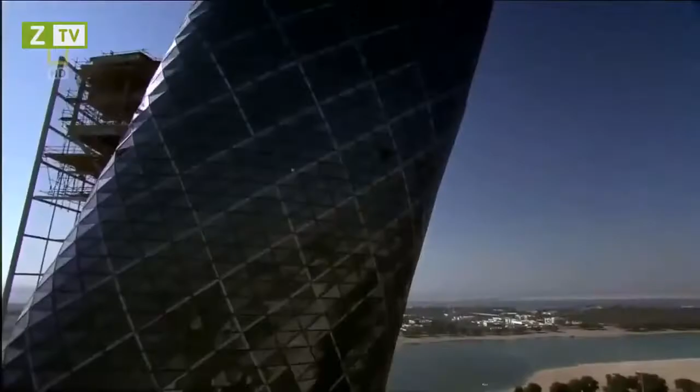Dubai is famous for its audacious engineering projects. But now, its neighboring city, Abu Dhabi, could surpass them all. This is Capital Gate, the most inclined skyscraper on the planet. It defies gravity, leaning at almost 5 times more than Italy's Leaning Tower of Pisa.

To make it stand up, it'll take some extraordinary engineering that could rewrite the skyscraper rulebook. Situated on the edge of the Persian Gulf lies the Sheikhdom of Abu Dhabi. It's the largest and richest of 7 states that unified in 1971 to form the United Arab Emirates.

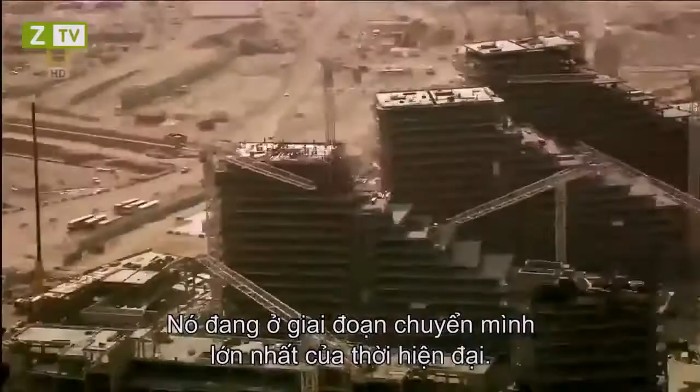Abu Dhabi is undergoing one of the biggest makeovers of modern times. Its ruler, Sheikh Khalifa bin Zayed Al Nahyan, wants to join the City Super League. And he's spending over $200 billion to transform his capital into a world-class business and tourist destination. He's already spent a reputed $3 billion creating the most expensive hotel ever built.

The Emirates Palace boasts 114 gold domes and is the height of luxury, where rooms cost up to $12,000 a night. And that's not all. He's built one of the largest and most opulent mosques on earth. Capable of accommodating 40,000 worshippers, the Grand Mosque boasts the largest carpet on the planet and the world's biggest gem-encrusted chandelier. But even these structures have not quenched his thirst for the extraordinary.

Now, the Sheikh wants a building so spectacular it will instantly become an international symbol for Abu Dhabi. The man appointed with the task of delivering this architectural icon is the Sheikh's cousin, His Highness Sheikh Sultan bin Tahnoon Al Nahyan. Architecturally, it will be a unique building, positioning Abu Dhabi as one of the cultural hubs around the world. And architecture is part of that overall inspiration and art.

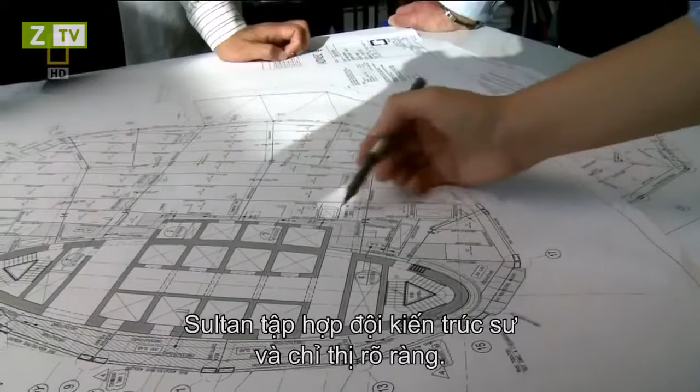It's a tough challenge. This is a land where extreme engineering is the norm. Neighboring Emirate Dubai has already built the world's tallest skyscraper, the 828-meter-high Burj Khalifa, and an iconic luxury hotel, the Burj Al Arab. Sheikh Sultan signs up a team of architects and gives them a clear brief, not to go bigger or taller, but to challenge the rules of architecture.

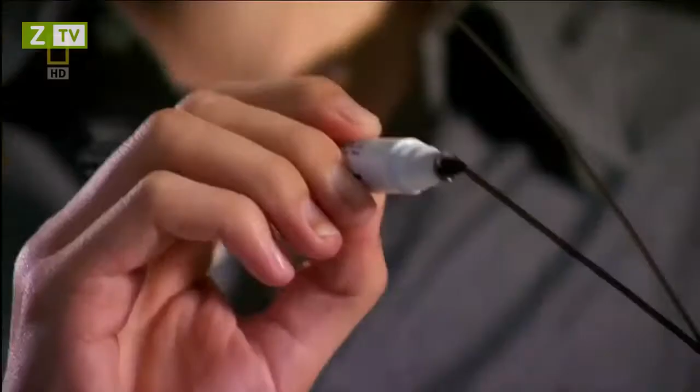For Neil van der Veen, one of the concept architects, it's a unique opportunity. The spirit of the times in the UAE was that anything was possible. Really, you could do anything. We can do something in the architecture that will represent that Abu Dhabi is right at the cutting edge. The architects look for inspiration in Abu Dhabi's landscape. They find it in the windswept dunes and the rolling waves of the Persian Gulf.

We took this idea of wind and water, which are both dynamic, fluid type of rhythms of nature, and we said, how can we capture those in time? As a result, you get a much smoother facade. I was really very happy when we first saw it, because with such a building, you can get the first impression from the first few seconds.

The team come up with an extraordinary design. A tower that spirals out of the ground to 160 meters, inspired by a desert whirlwind and the splash of a wave rising over the sand. This gravity-defying skyscraper tilts almost 5 times more than Italy's Leaning Tower of Pisa. No single angle of this tower is the same as another. It's a structure guaranteed to amaze.

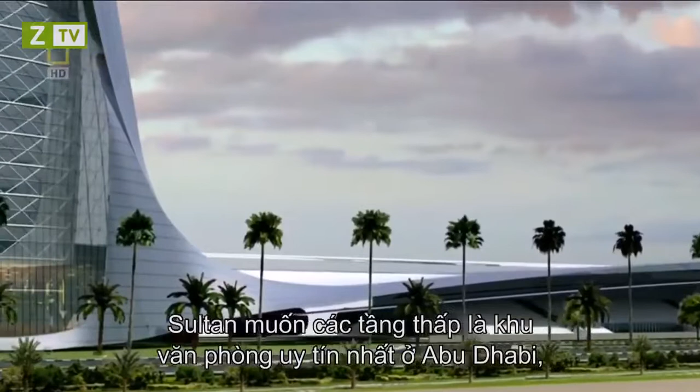We really wanted this to happen. They could see a vision suddenly, they could see something that would stand for them. Then there was no stopping us. Sheikh Sultan wants the lower floors to become the most prestigious office address in Abu Dhabi, with the top 18 levels assigned as a 5-star hotel fit for royalty.

But for maximum impact, this landmark skyscraper also needs a prestigious location. The Sheikh decides the tower will stand next to a monument of national importance, the Grandstand. Built by his uncle and founding father of the United Arab Emirates, Sheikh Zayed, it's used to this day for national celebrations. This monument and the skyscraper will link Abu Dhabi's future with its past.

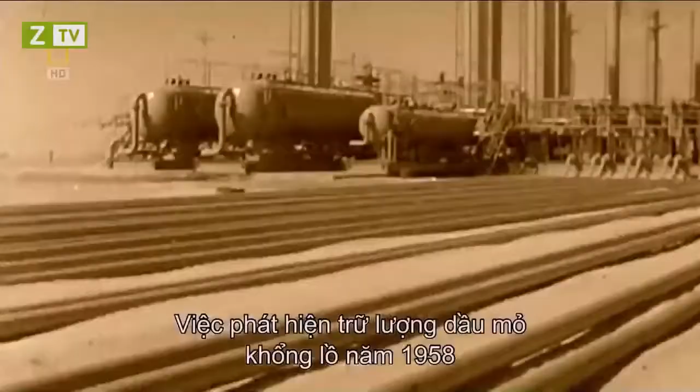Over the past 50 years, this land has experienced extreme change like no other. The discovery of huge oil reserves in 1958 set the wheels of progress in motion. Abu Dhabi's ruler Sheikh Zayed had a vision to unify the sheikhdoms and secure their financial future from Western dominance. He then set about using his black gold to create a city that rose out of the desert.

Today, Zayed's legacy is all around, and now his son wants to leave one of his own. To transform Abu Dhabi once again, but this time to put it on the world map. Sheikh Khalifa plans a new $2 billion business district called the Capital Center, situated alongside the Middle East's largest business hub, the Abu Dhabi National Exhibition Center. It's the ideal location for an architectural icon. And inspired by its location, the new tower is named Capital Gate.

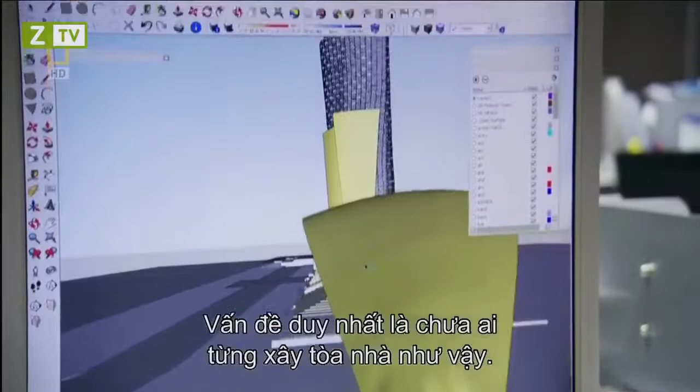Now, the idea must make the leap from the drawing board to the construction site. The only problem is, no one has ever attempted a skyscraper like this before. Everyone realized that this is a crazy structure to build, and how are we going to build it?

To make Capital Gate's gravity-defying design a reality, it'll take some extraordinary engineering, and the challenge begins on day one. Its top floors overhang its base by 33 meters, creating huge forces that want to rip the building's foundations out of the ground.

At the construction site, project architect Tony Archibald is daunted by the task ahead. When I first joined the job, I was shown the drawings, and I kind of did a double take, and I wasn't quite sure that I got the correct understanding of the project, and it took me a few moments before I realized what we're about to undertake.

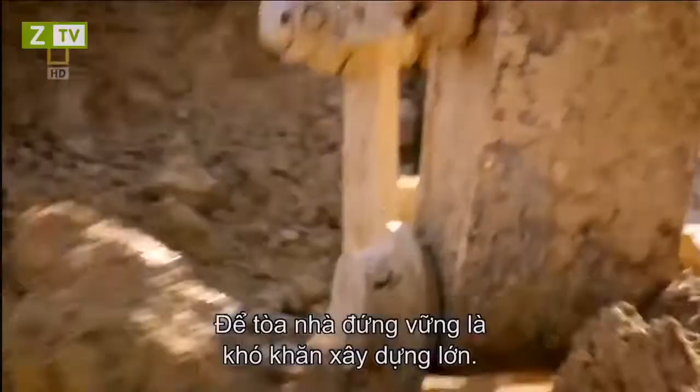Keeping Capital Gate upright is a huge engineering challenge. There isn't just one solution. To overcome the forces of gravity, it will take a whole range of pioneering techniques. But the task starts with the foundations, deep underground. On one side of the building, the weight is going down into the ground. On the other side, it's being lifted out of the ground. And that's due to the large overhang that we're having to deal with.

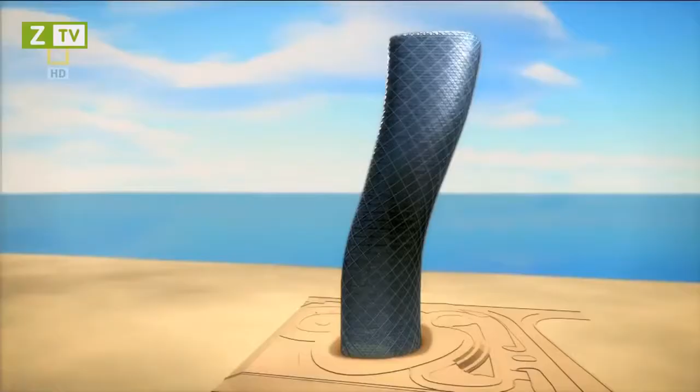The solution requires almost 400 concrete piles that work in 2 different ways. On the leaning side, half of the piles push the overhang's forces into the ground. On the opposite side, the remaining piles anchor deeper into the bedrock. They resist the stretching forces trying to wrench the building out of the ground.

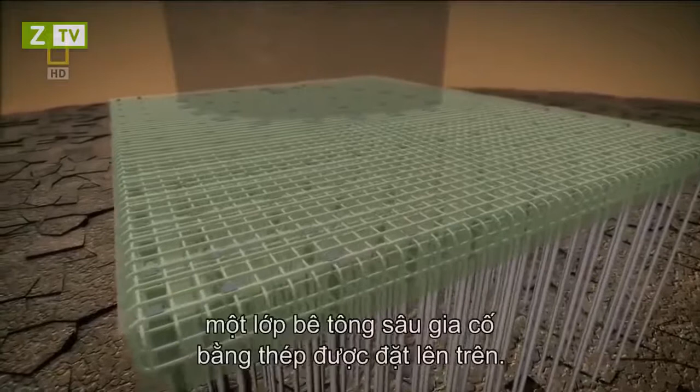Finally, to evenly distribute Capital Gate's forces into the piles, a deep concrete slab reinforced with steel is laid on top. What the foundations taught us is that every single aspect of this building has to be custom engineered.

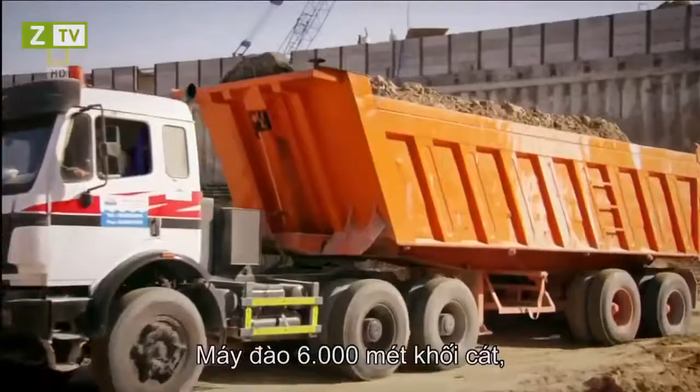Excavators dig out a colossal 6,000 cubic meters of sand. And over 8 weeks, hundreds of piles are driven into the ground. We had an awful lot of piles to put in a very close proximity. It was a real difficult challenge. There can be no let-up on this schedule. Sheikh Sultan wants Capital Gate complete by an impossibly tight deadline.

In less than 2 years' time, Abu Dhabi will host the World Future Energy Summit. Over 3,000 delegates from 50 countries and the world's press will convene at the neighboring Abu Dhabi National Exhibition Centre. It's the perfect opportunity to showcase Capital Gate and prove Abu Dhabi is at the forefront of innovation. But this gives the team just 24 months to design and build a unique skyscraper.

With the foundations finished, building above ground can begin. But because of the dramatic lean, it will have to be constructed in a very different way to a conventional skyscraper. We realised once we'd done the foundations that this was going to be the first of many difficult problems. A normal skyscraper requires a solid core to hold it upright. But Capital Gate's curves will just crack and topple a standard core. Engineers must discard conventional thinking and devise a way to defy gravity.

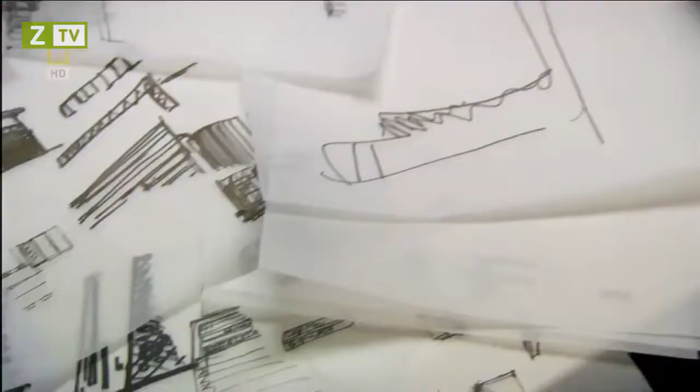Inspired by the nearby desert landscape and its wind-shaped dunes, architects have designed a curved leaning tower. But it'll take some audacious engineering to stop Capital Gate from falling over. Normal skyscrapers are built around a slim vertical core, which helps to channel the building's weight into the ground. There's so much overhang on this building that with a conventional core, there was no way it was going to work. You just can't build a straight core. It's just not strong enough.

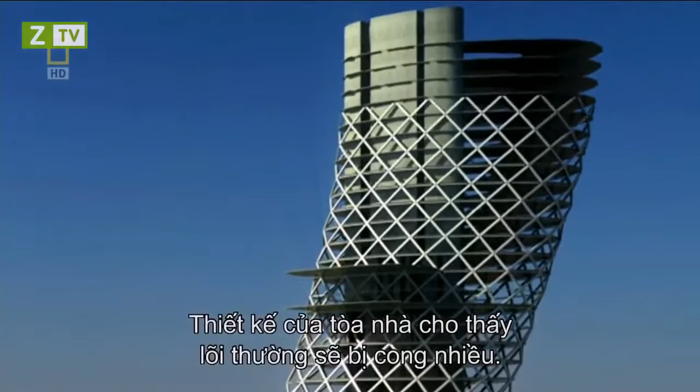Capital Gate's design would cause a conventional core to bend dangerously. The pull of the massive overhang wants to stretch the core on one side, causing the concrete to tear apart.

Structural engineer Mona Vassi knows it's a serious problem that must be solved. When I saw this one, I thought it's impossible, it's not going to work. It's just some sketch somebody left somewhere. But I always think that for the architects, it's easier for them to just draw something, but it's not easy for us to fulfill or satisfy their need.

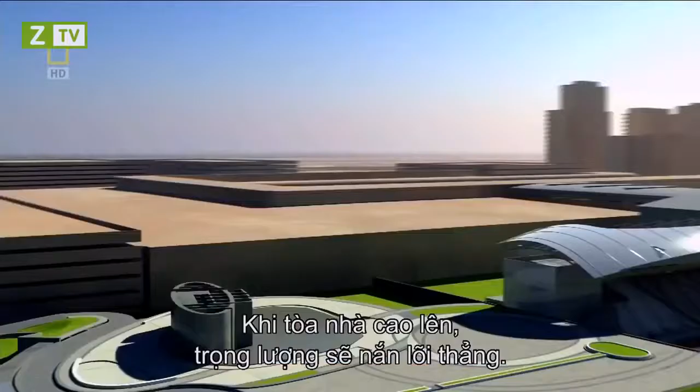The engineers developed 2 groundbreaking solutions. The first part of their plan is to build the core with a curve, bending in the opposite direction to the building's lean. As the structure grows, its weight pulls the core straight. In total, it shifts 350 millimeters, and the effect is significant. The concrete that would have been stretched by the overhang's pull will now be compressed and strengthened.

You build it bent, and then as you add the slabs to the upper levels, it pulls it back into vertical. So basically that whole vertical core is in compression, and that gives it immense strength.

The core grows 4 meters a week, and construction manager Les Fairchild is in charge of building it. This is probably the most complex core that I've come across. It's built at an angle, and effectively the core holds the whole building up.

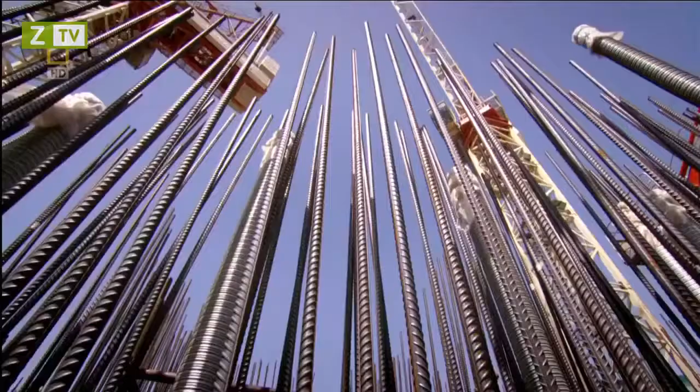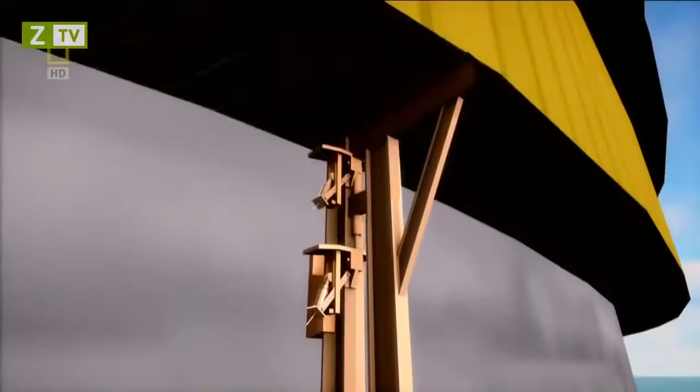The core is built using a technique called jump forming. First, a dense mesh of steel reinforcement is assembled. A mold then closes around the steel to form the shape of the core. The steel mesh is then filled with concrete. Then the mold or form can climb up the core wall for the process to start all over again.

Jump form is a hydraulic platform. Once we've cast each 4 metre level, we simply attach it to some runners and we jump it hydraulically up to the next level. The core will be strengthened as it straightens. But for the core to carry extreme loads, the concrete must be reinforced using steel rods called rebar.

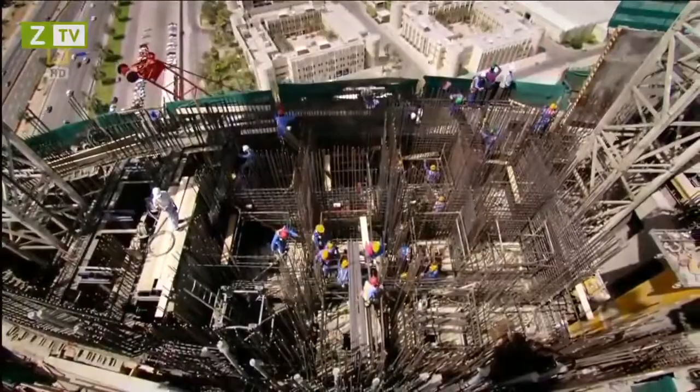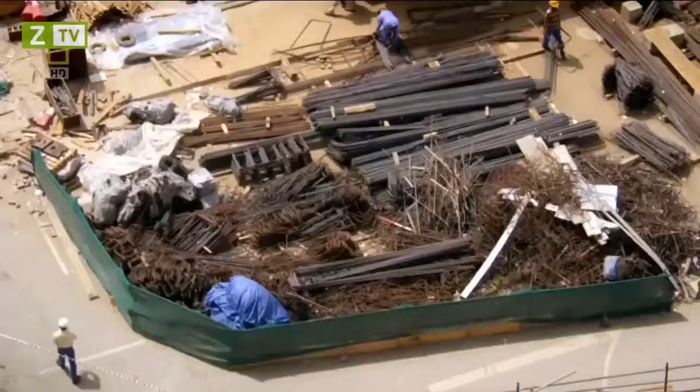The rebar is installed during the daytime, but temperatures of up to 50 degrees Celsius and concrete don't mix. It dries too fast and could crack. To set at the right speed, the concrete has to be poured during the cool of the night. As the core grows higher, the liquid concrete has to be pumped over longer and longer distances. So the consistency of every batch is first checked in a slump test to ensure it won't block the pipes.

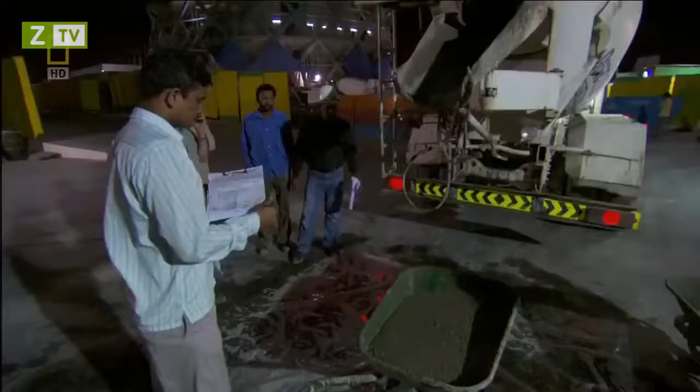When you first see it coming out the wagon, you can usually tell whether it's a tight mix or whether it's a loose mix, and that's what we're testing for really in the slump test. We simply make a cone, lift the cone off, and depending on how much it reduces in height, it tells you exactly what the slump is. The one we just witnessed is 215 millimetres, which is within the specification, so that's good to go.

Whilst the truck drives to the pump, Fairchild needs to get onto the core. He can take the stairs, but 90 metres up is a long climb. He knows a much faster way. Crane lift.

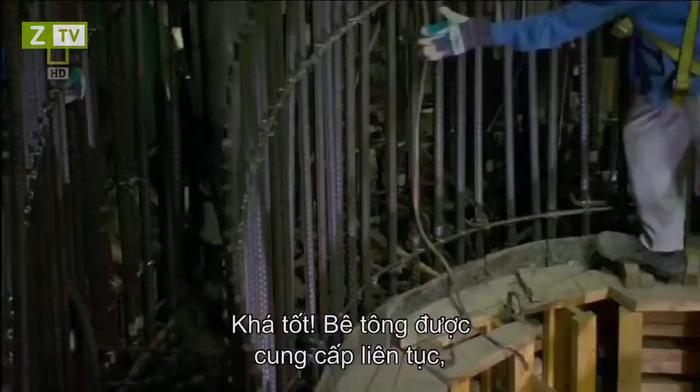It's going fairly well. We've had a nice continuous supply of concrete and we're now pumping it up to the upper levels of the building. And the lads are just steadily working away. They actually work from one side to the other in metre deep layers, so they're doing everything right. It's always exciting when we pour concrete. It means it's another achievement really. We're going up another level.

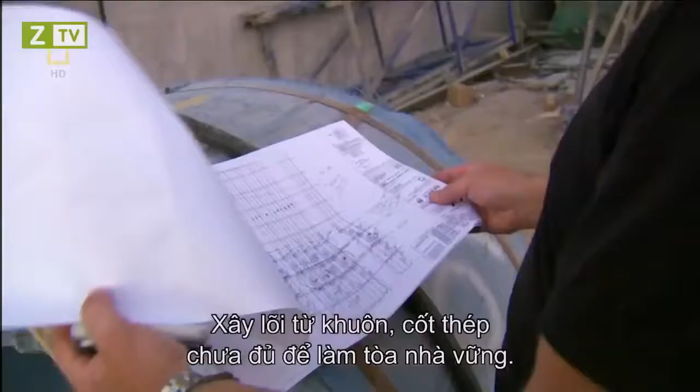But building the core out of alignment and packing it with rebar still isn't enough to stop gravity toppling Capital Gate. What we came up with is a post-tensioning solution where we introduced much more reinforcement into the core wall and then used the tensioning process. Basically that was done by introducing high tensile strands to the centre of the walls. When we reach the designated height, we simply apply tension.

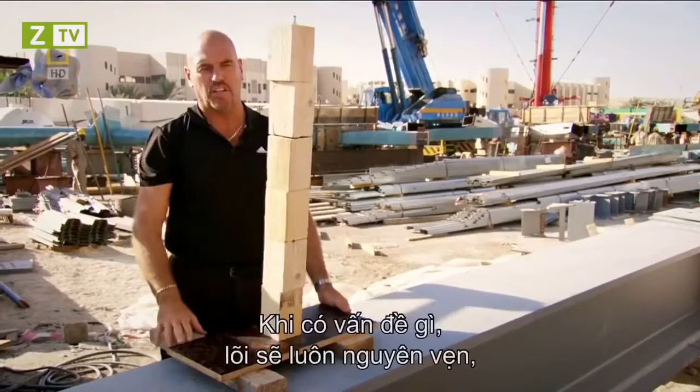We're actually stretching the tendons that fall through the wall and we're actually pulling them tight, and that's done by a tensioning machine. So effectively, when the tension is complete and the load was applied, the core would stay intact and the additional reinforcement would prevent it from falling over. To post-tension the core, 146 steel tendons are threaded vertically through the concrete.

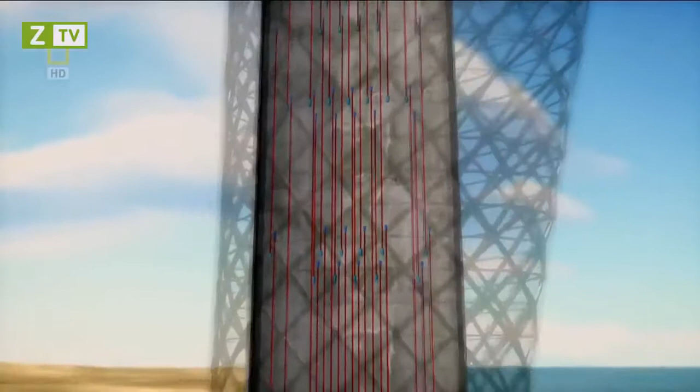Each tendon is 20 meters long and runs through 5 floors of the building, overlapping each other for maximum strength. When the tendons are stretched, the stress counteracts the pulling force created by the massive overhang, stopping the concrete from tearing apart. On site, the team are post-tensioning the core. But no one has ever attempted this vertically in a skyscraper.

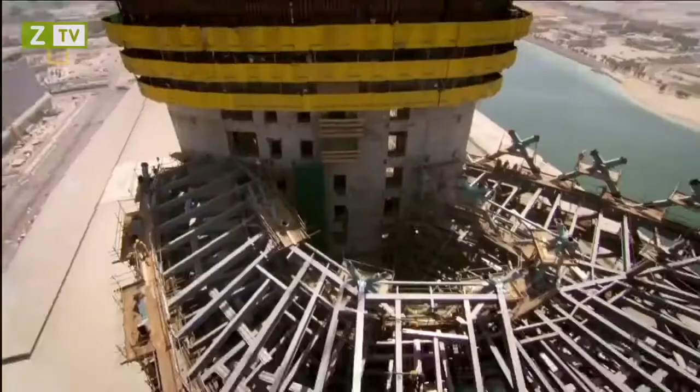The long tendon is lifted to the top of the core. The team used the steel tendon's weight to force it through a duct already cast through the core. Once the tendon is in position, the team lock off both ends, ready to tension its individual strands. A pneumatic jack clamps around one strand at a time and stretches it. It's equivalent to about 5 family cars pulling on one end of the rope.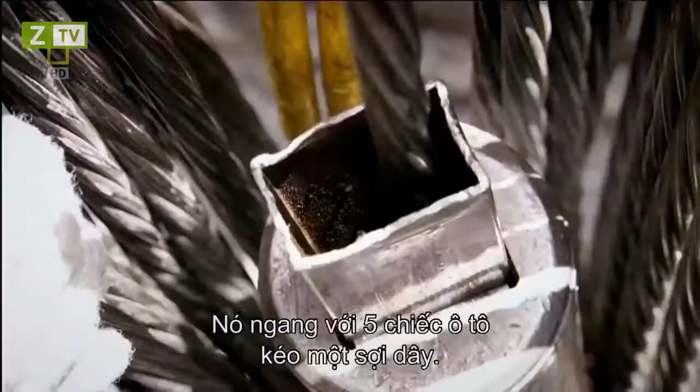With the steel tendon now stretched to the right stress level, concrete pouring can continue upwards. The quantity of cable that's been used is approximately 120 tons and 120,000 metres in length. It's about 44 times the Golden Gate Bridge. This process is repeated over and over and means the core should withstand the huge loads generated by Capital Gate's extreme overhang.

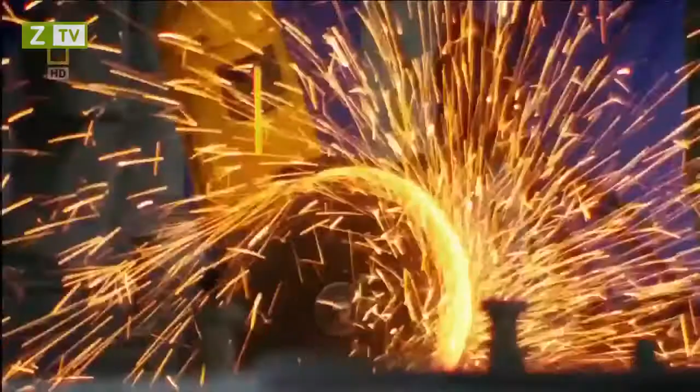But now, an even greater challenge must be tackled. The building's twisting, leaning design must somehow be turned from theory into reality. And once again, it'll mean bending the rules of architecture.

To create Abu Dhabi's architectural icon, Capital Gate needs an exterior curved leaning frame. But once again, the building's extreme tilt creates a problem. The shape of the building with this very pronounced overhang meant that traditional skyscraper building solutions just weren't going to work. There was no way. The building design requires it to be thin to maximize floor space and allow for huge panoramic windows.

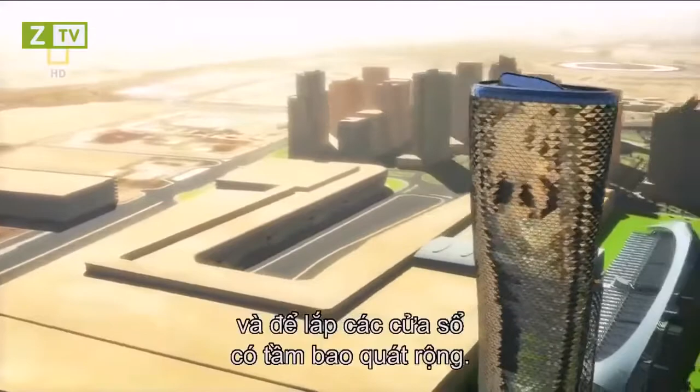Irfan Ahmed is one of the engineers who has to find a solution. For structural engineers, always it's challenging to accept the architectural requirement, you know. They always want thinner and thinner and thinner. Surprisingly, the humble chicken could help with this engineering dilemma. It is essentially a skin of structure around the outside of the building, not unlike an egg.

An egg can withstand huge loads because it evenly distributes forces down through its shell, which means the shell can be thin, creating more space inside. So it's very, very thin, it's very, very strong. If I try to crush this egg, you can see that it's actually amazingly resilient. So let's see how resilient.

Here I have 170 eggs laid out, and we're going to put load on top of these in the form of breeze blocks. Moment of truth. So far, so good. Each one of these blocks weighs 15 kilos. So we've nearly got half the weight of a car on here now, on our 170 eggs. Let's see how far we can push this.

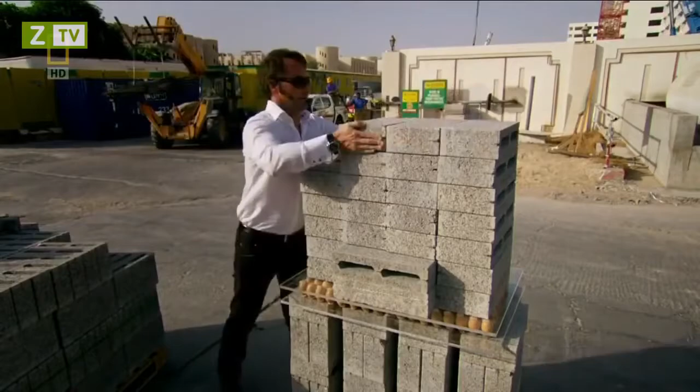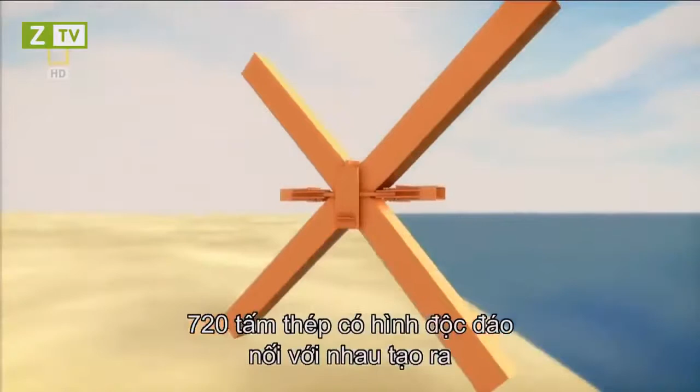Capital Gate can't channel forces with eggshell, but it can use the principle of how it works, using a diagrid. A diagrid is a giant mesh of steel that wraps around the core. Steel beams connect to a node or joint to form a cruciform section. 720 uniquely shaped sections link together to form the thin but immensely strong diagrid. Working together, these cruciforms equally distribute the forces down the outside of the building.

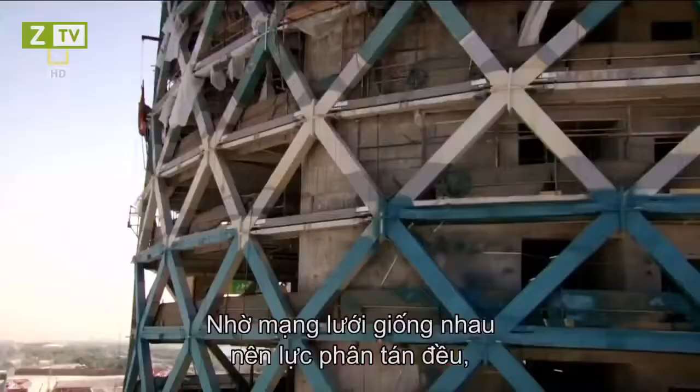The way it does that is by making a uniform net, so that the forces are very evenly distributed. And that means that we can get away with slenderer sections. On site, a team of 240 steel fabricators assemble the diagrid. They've built the easier straight part of Capital Gate's base, but now the structure is starting to lean, making installation even more challenging.

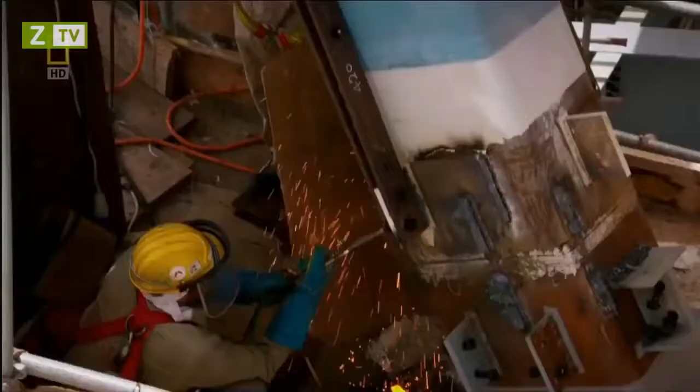Each cruciform, weighing up to 16 tons, has a unique geometry and must be crane lifted at a precise angle. If the diagrid is not assembled with millimeter accuracy, the mesh will not channel the loads and the structure could be weakened. The engineers must communicate closely with the expert steel fabricators. They design and manufacture the diagrid 150 kilometers away in the neighboring emirate, Sharjah.

Here, cutting-edge construction is the norm. They've built one of Malaysia's Petronas Towers and Dubai's iconic skyscrapers, the Burj Al Arab and the Burj Khalifa. But Capital Gate's revolutionary design pushes even these experts to the limit. On the planning floor, project engineer P. Bhaskaran and his team need bespoke 3D software to tackle the building's highly complex diagrid. The 3D modeling is done, and any unforeseen criticalities will be very clearly identified in the 3D model.

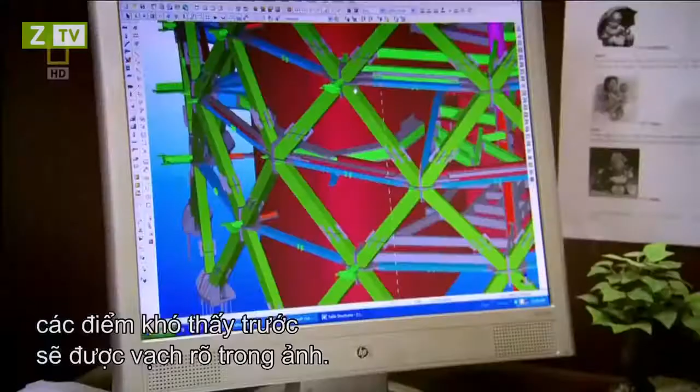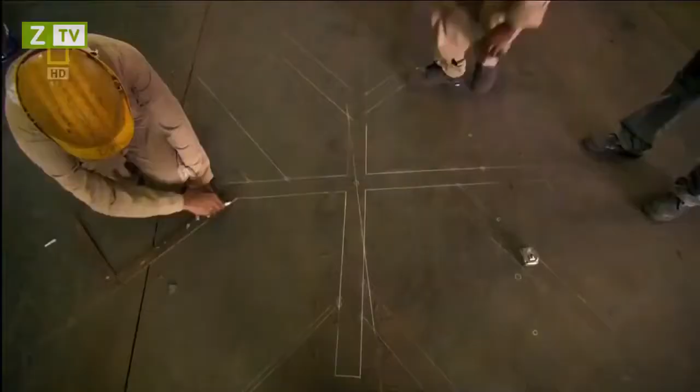Each one of the 720 cruciforms is precision engineered, not only to channel huge forces, but to connect with millimeter accuracy to the neighboring cruciforms and the glass facade. But to measure their exact angles, the team used some old-school technology. Chalk. It might look unsophisticated, but it's highly accurate, ensuring all the elements will join together.

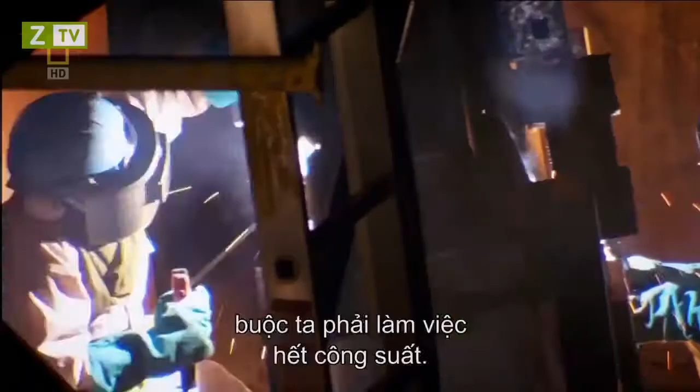To keep up with construction, the factory must produce 18 cruciforms every week. Constructing such a huge building, this critical building within the short span, without working 24 hours, it is absolutely not going to happen. As the skyscraper reaches new heights, the long hours start to pay off. This design pushes the diagrid technology to its absolute limit, and in fact far beyond what's ever been achieved so far. Even in your dreams, you're thinking about this project. So once you see the structure coming up, you forget all the long hours you spend and all the sleepless nights.

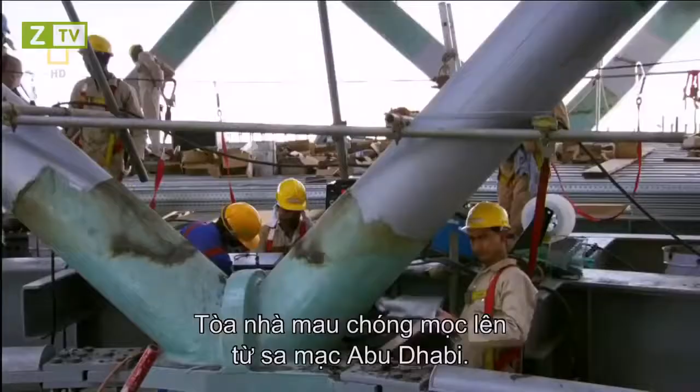A colossus is fast emerging from the Abu Dhabi sands. Now, this leaning tower must be clad with a glass facade. And as always with this gravity-defying structure, it's going to require some revolutionary engineering.

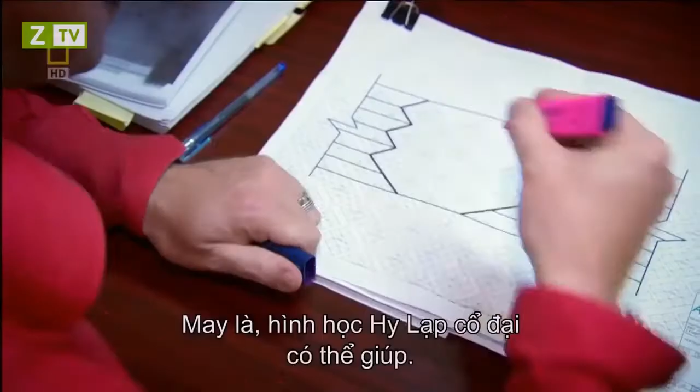Glazing Capital Gate's leaning curved frame is a major problem. Covering its unusual contours with curved glass will blow the budget. So the skyscraper's curves must somehow be clad using cost-effective flat glass panes. Fortunately, ancient Greek geometry can help.

Because you've got a complex shape, it's an organic shape, it's a curved shape, the only way to model that with straight lines is to use triangles. Triangular panes can pivot in 3 directions, and when joined together can cover complex geometric surfaces. But because every angle of the building is unique, it'll take 26,000 triangular panes to form the facade.

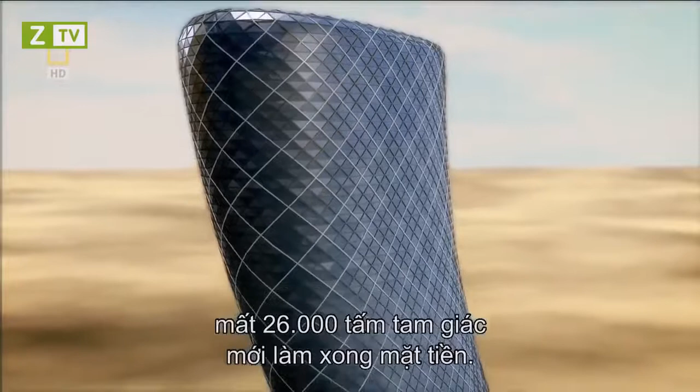With so many glass triangles to cut, the local glass factory springs into action. Each pane is scored by an automated diamond cutter to an exact pattern. The triangles are then sent along the production line. The team is under constant pressure to deliver enough glass to the site. Hey, this side, 2 guys, holding.

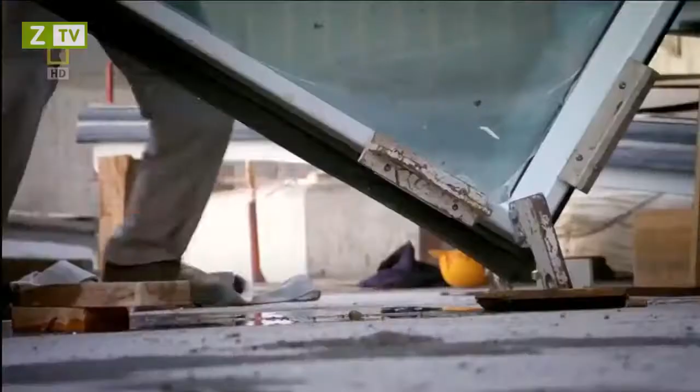After several weeks, 8 diamonds are in place and another 100 standing by. But the glass design is so unconventional, it still has to pass a number of tests to prove it's up to the job. Because we'd already started the glass installation, the results of this test were absolutely key. Each panel is stacked one upon the other. So if we'd had any kind of problem, we would have had to unstack them, which would have had disastrous consequences for the program.

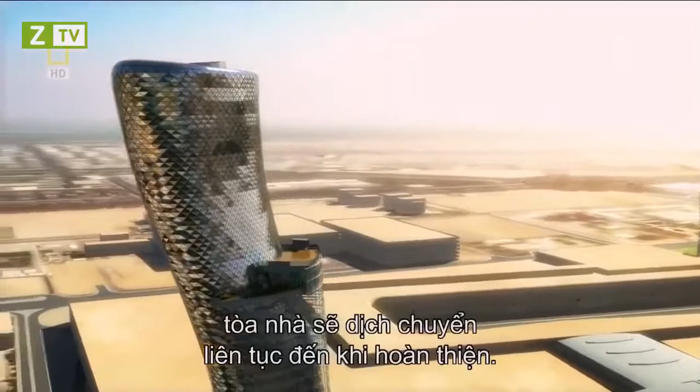This is no ordinary glass skin after all. Capital Gate's core straightens as it grows. The skyscraper will not stop moving until after completion. Normal glass facades can accommodate minute movements caused by wind and temperature changes. But to stop the glass shattering and keep the building watertight, the panels must be designed to shift by up to 20 millimeters. The scale of that kind of movement is almost unheard of in glazing systems. It's a vast amount of movement.

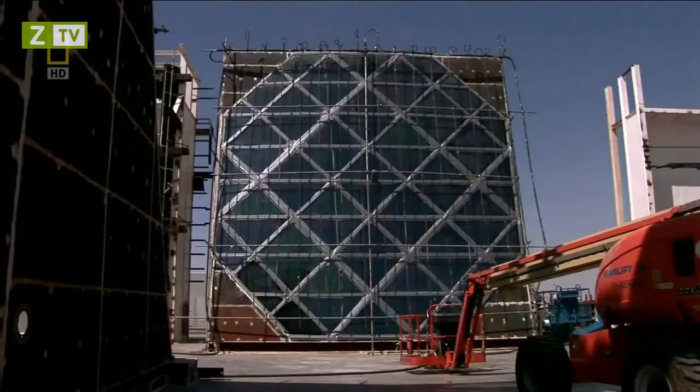With glass installation ongoing, construction manager Craig Rooney needs to know the panels will perform. We don't want to get to the top, we've done it, we've installed it, we think we've done a great job, and then it all leaks. The panels must be tested to the limit at a Dubai laboratory. A plane engine and many litres of water simulate worst-case scenario weather.

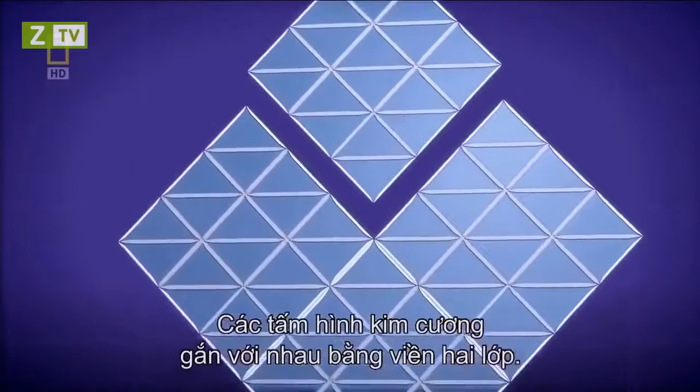Now the moment of truth. Any leaks could be a disaster. And it's bad news. The first time we got a full water test, we had a leak. The fact that we had a leak was devastating to the whole team and very alarming. The diamonds connect to each other by a bespoke two-layer seal. The flexible spongy seal allows the diamonds to move and keeps water out. But if any water does seep through the outer seal, drainage tubes fitted at intervals let the water flow away.

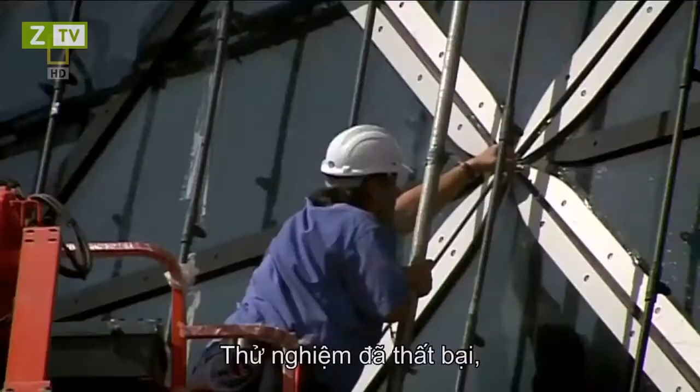The panel has failed the test. Water has flooded inside and penetrated the inner seal. If it was a fundamental failure, we're back to the drawing board, so the cost and the budget and the program all go completely out the window. The panel is examined. Answers are needed fast. Fortunately, it's not a design failure. They discover a drainage tube is only blocked with sand. The problem resolved, installation can step up a gear.

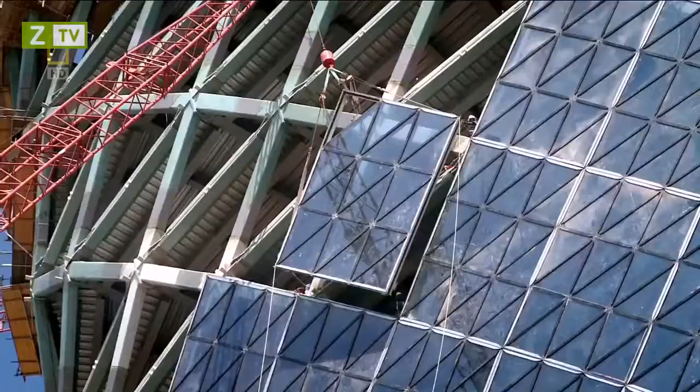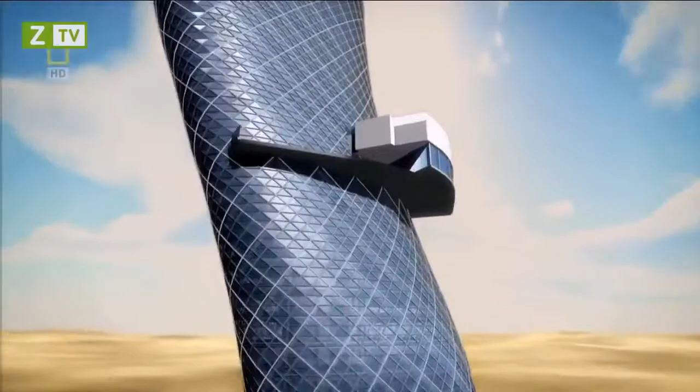But as always with this audacious building, one problem is solved and another is just around the corner. To give Capital Gate's five-star hotel lobby the wow factor, architects again plan to push the design to the extreme. Now they want to build an infinity pool and a restaurant, hanging 100 meters above the ground.

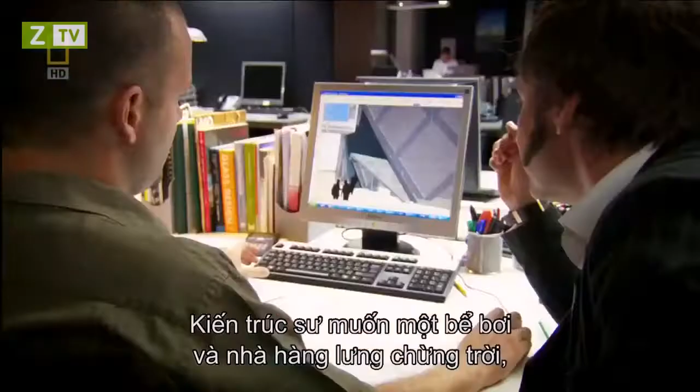18 months into the build, Capital Gate's design is about to give a new slant on high-rise living. The architects want a pool deck and restaurant suspended in the sky, but it's an engineering headache. There's so many requirements that architects have that really put us in so much trouble as engineers. But you want to make sure you have a safe structure.

The design calls for a two-story extension, hanging without any visible support. But the pool's water alone will weigh 150 tons. The structure's huge mass means it needs reinforcement. We needed some supports from below, otherwise there was no other solution. I don't think you can have a cantilever that huge on this building, no way.

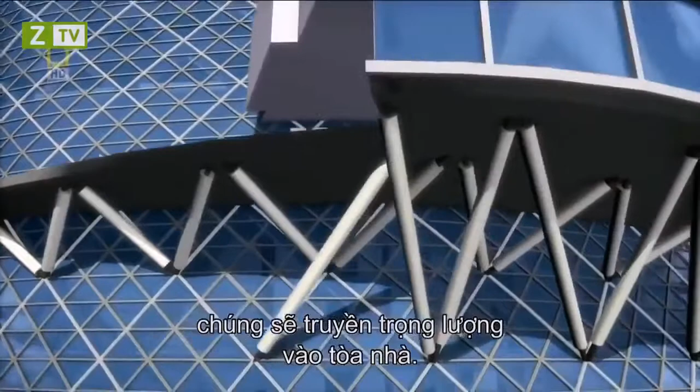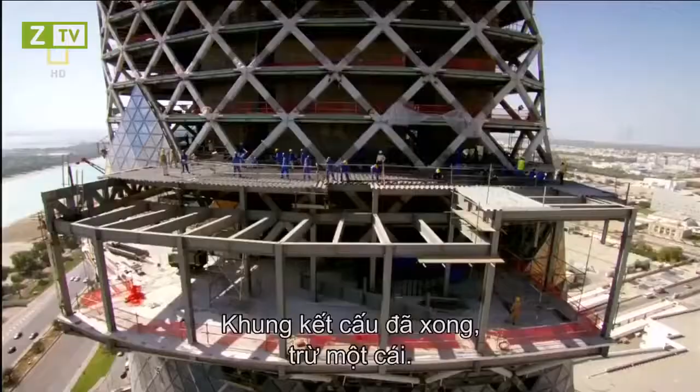The design will only work if it's underpinned with 22 steel struts. They will carry the loads back into the building. But the struts must also look delicate to meet the architect's aesthetic demands. On the construction site, 90 meters up, the pool and restaurant is taking shape. All of its structural elements are in position, except one. The team are raising its last 6-ton floor beam.

It's taken many crane lifts, but one of the highest suspended swimming pools in the world has made the leap from blueprint to building. See all those lines that you just drew? They're actually drawing the same thing for you, but with a crane. But the feeling is indescribable.

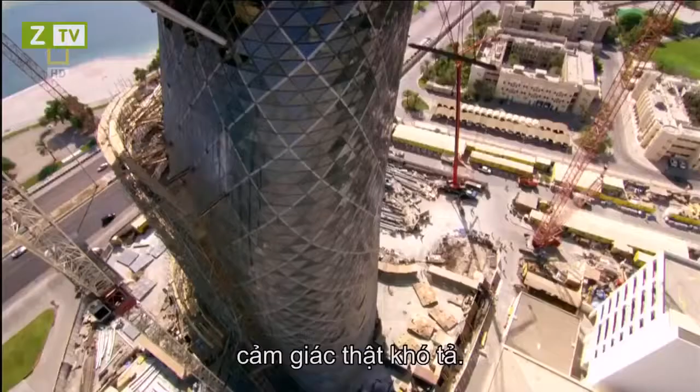And the structure's muscular struts and connections are also elegant. The idea behind these junctions is that they behave like the insects that can walk on water. They're sufficiently light that the surface tension keeps them above the water. So these little brackets dissipate the forces from all that weight.

Capital Gate is fast becoming an Abu Dhabi landmark. But the taller it gets, the more the weight of its upper floors is a problem. The skyscraper needs to go on a diet. And this time, the architects come up with a clever solution. The building has lots of visual surprises.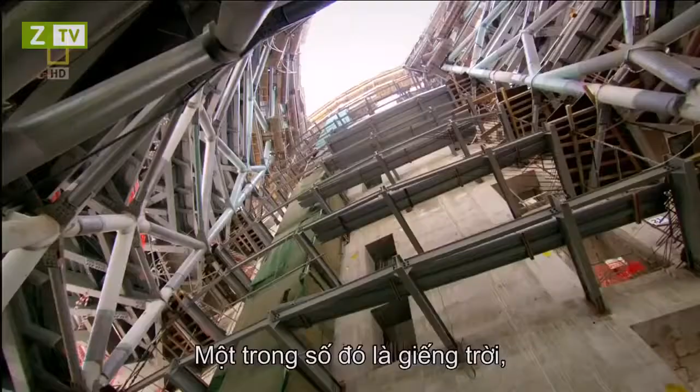And one of the most important ones of those is the internal atrium. It's a kind of a light well that brings light from the sky deep inside the building, and it extends over half the height of the building. So it starts out very, very small at the bottom and opens out in a big funnel. This cavernous hole is good news for reducing weight and minimizes forces. But the atrium is a double-edged sword.

The floors are critical in transferring loads from the diagrid to the core. A giant hole through 18 floors means these loads must find another pathway. It's a very, very big hole in every single floor plate. So our engineers really have their work cut out. You don't want to have an opening in your floor. You want to have more reinforced concrete to transfer these forces. The forces need to flow away.

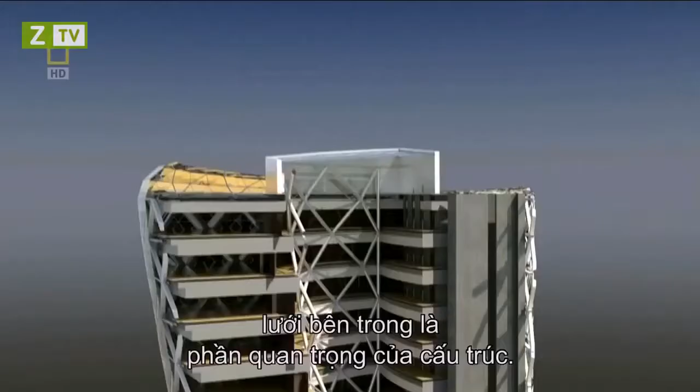And the solution is pioneering. An internal web of steel mirroring the external diagrid. This is the first time we've ever heard of this being done. The internal diagrid is actually a fundamental part of the structure. This funnel-shaped internal skeleton carries the forces of an 18-story building down to its tapered base and into the core.

But the loads are extremely high for such a small area. To stop the atrium punching through the core wall, the concrete needs protection. The answer? 6 giant plates of steel that brace the connection to the core wall. The connections are really a wonderful, wonderful piece of engineering. They're 8 meters high, they span 2 floors, and they connect back into the core. The atrium's near completion brings Abu Dhabi one step closer to achieving an iconic landmark.

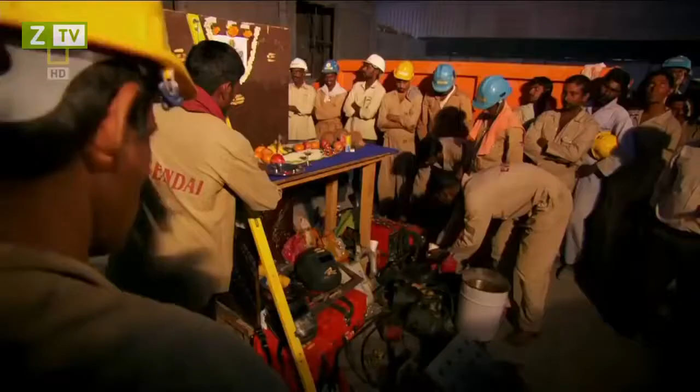But as the sun goes down, this isn't the only celebration underway. On site, the Indian steel team are holding an annual blessing to the Hindu god Lord Vishwakarma, the protector of architects and engineers. Their livelihoods depend on staying safe, and although they use safety equipment and are highly skilled, working with huge sections of steel at height is never risk-free.

We pay our respect to God and get the blessings from God. We do that for the safety of all our workers and for the proper completion of the job. Every trade of workers, the basic tools they are using on site, has to be kept in front of God, and the workers feel that they are in safe hands. The tools are now blessed, and the steel team's morale is high.

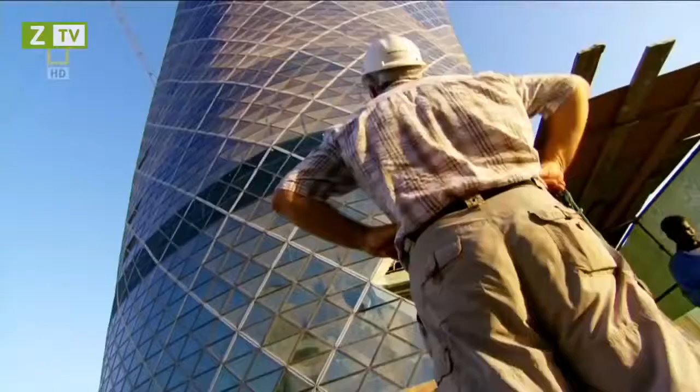But the glass installers, lifting diamonds to over a height of 100 meters, are getting the wrong kind of lift from Abu Dhabi's highly unpredictable wind. If the wind is too strong, then you can feel this in your hands when you hold these diamonds by rope. I always get nervous if I see the panel starting turning. And this makes me always a little bit afraid when I see diamonds going up and starting moving.

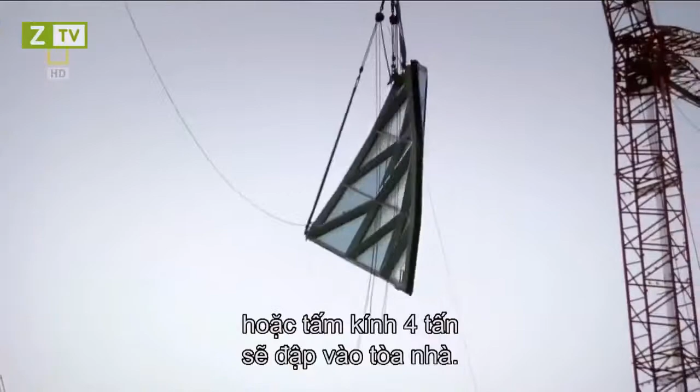Meyer has to act quickly, or this 4-ton diamond could smash into the building. Not for the first time, lifting glass is delayed by changeable weather. At this rate, Meyer won't install the remaining 107 panels in time. But Abu Dhabi's wind isn't the only problem the Capital Gate team face. A last-minute design request comes in from the Sheikh's office that could have serious implications.

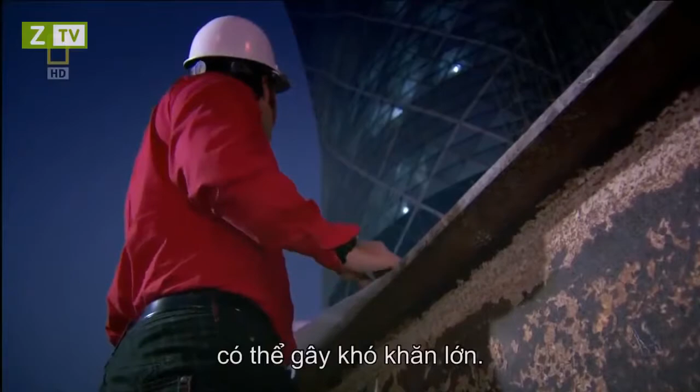With just 6 months to go to completion, the Capital Gate team should be on the home straight. But those plans may have to be put on hold. I had a telephone call saying that we had to put a helipad on the roof, which I thought was a joke, but I was astounded that we got this at such a late point in the project.

Integrating what will be Abu Dhabi's highest helipad atop one of the world's most daring skyscrapers at first seems a simple request. But it actually poses 2 serious problems. It'll create new forces that must be absorbed by the already strained core, and unpredictable wind flows that can cause potentially lethal flying conditions. You get a thing called wind shear, tipping the whole helicopter onto its side, and this is a very real and very dangerous risk.

These rapid wind changes, known as wind shear, can affect the lift on helicopter blades. Aircraft can be blown off course, or literally fall out of the sky. There is no way that we could have any margin of error on the safety. The only way we could predict what the wind shear would be like on the top of the building was to model it in a wind tunnel.

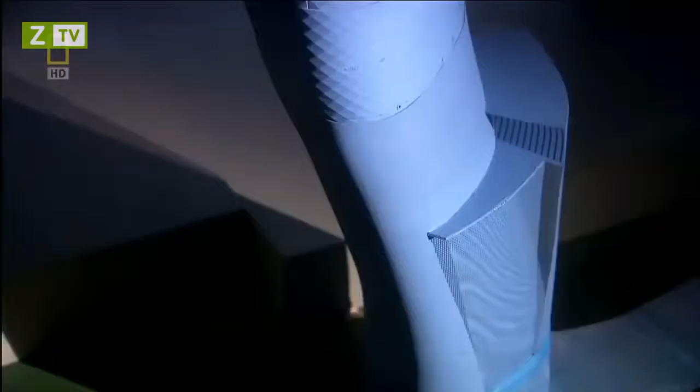In London, England, a scale model of Capital Gate is put through its paces in a high-tech wind tunnel. Just as the team fear, within seconds, wind shear conditions appear. Air currents are flowing over the top of the building, but then separate from the surface, spiraling inward to form a realm of turbulence.

Wind engineer Leighton Aurelius knows the consequences could be serious. If the pilots lose control in this random ball of energy here, they may in fact end up crashing onto the helideck, or even worse, onto the tower itself. Make sure that can't occur. But that's not all the wind tunnel test reveals.

Wind impacting the helipad is also creating huge suction forces. We're talking about very large forces here wanting to pull the helipad off the top of the building. Something in the realm of several large trucks or big rigs trying to pull this helipad away.

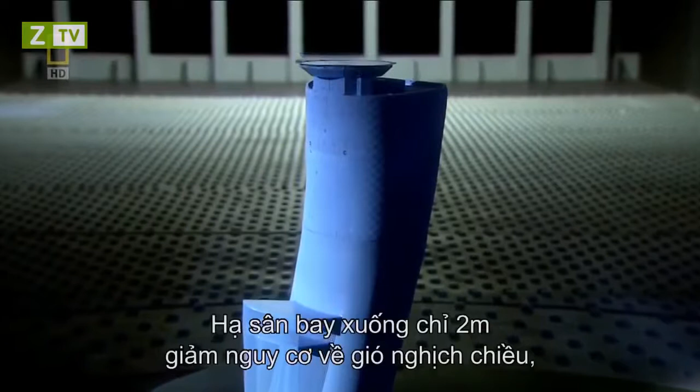To make the helipad safe, Aurelius and his team have to go against conventional thinking. We didn't think that lowering the helipad was actually going to be the optimum design, but we see reduced loading on the helipad as well as safer conditions for the pilots to land in. Lowering the helideck to just 2 meters above the roof dramatically decreases the wind shear threat, and means Capital Gate's core will withstand the additional loads.

We're relieved, frankly. The tests have actually confirmed now that we can have it in our original design position, which is very low, which will mean that the profile on the skyline is exactly where we want it. But it'll take another 5 months to just draw up the helipad's blueprints, and a crane must be left behind to build it.

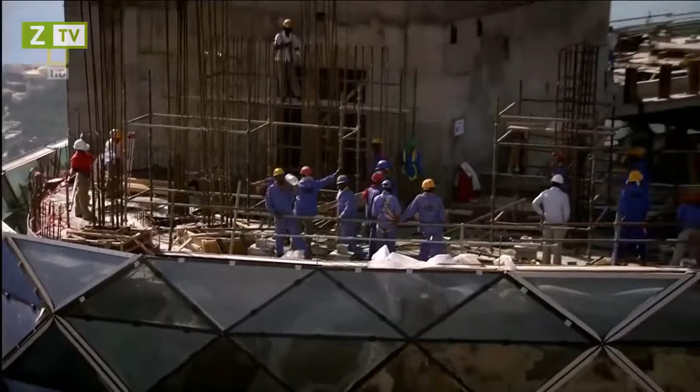Now, with only weeks to go until 0 hour, the team are installing one of the last glass panels. It's a moment that once seemed a long way off. In my office I have a plan of all the diamonds we have to install, and in the beginning it looked like I'm in jail and I'm marking the wall with marks for each day. And so in the first time I felt I never will finish this project. Just 10 months since the first diamond was fitted, the facade now shimmers in the sun.

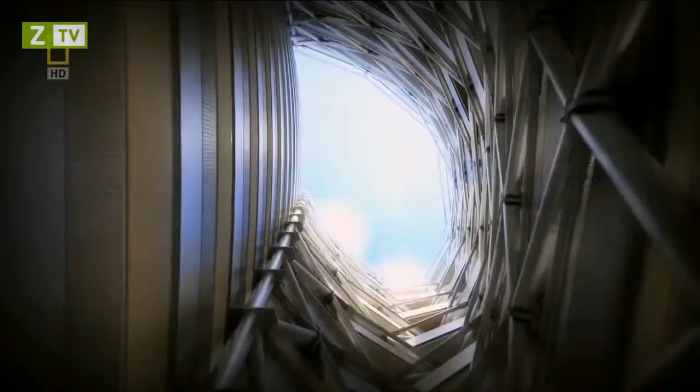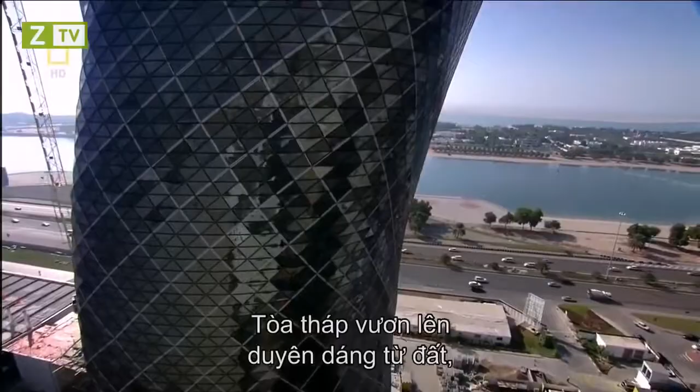Capital Gate's internal fit-out will take another year. Only then will its 5-star hotel and Abu Dhabi's most unusual office address be open for business. But against the odds, the team have created one of the most extraordinary megastructures on the planet. Capital Gate twists and spirals out of the ground, soaring to a full 162 meters. It's taken nearly 6 million man-hours to construct, and its overhang is spectacular.

You see the building and you stand underneath the overhang. It's extremely impressive. It's a fantastic feat of engineering. I feel as though I've been here an eternity, but it's probably been the quickest 2 years of my life. It's been an amazing journey and we've learned so much. And actually I think we've demonstrated that some things that looked impossible or even ridiculous were actually possible.

And Abu Dhabi's past will soon be physically linked to its future by a wave of steel that'll rise over the grandstand and splash up the skyscraper's mirrored glass. Abu Dhabi is a fascinating part of the world to be at the moment. It says to people we can step outside of the box. We don't have to follow the rules.

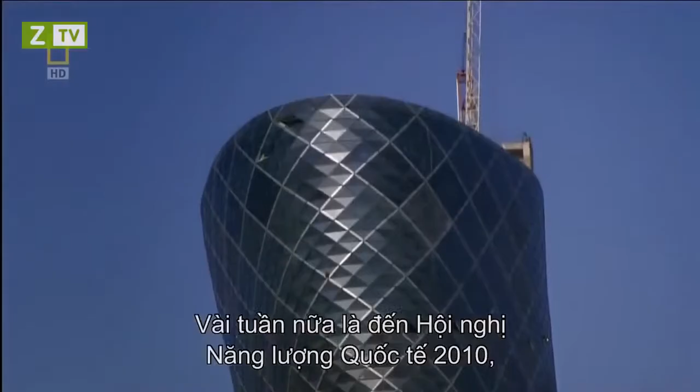With the 2010 World Future Energy Summit just weeks away, Sheikh Sultan can be sure Capital Gate will show the world what Abu Dhabi is capable of. This building is really iconic. It catches the spirit of Abu Dhabi and will be part of the postcard image of Abu Dhabi. The team have achieved what some thought was impossible. A leaning tower that claims the world record for the most inclined skyscraper on Earth.